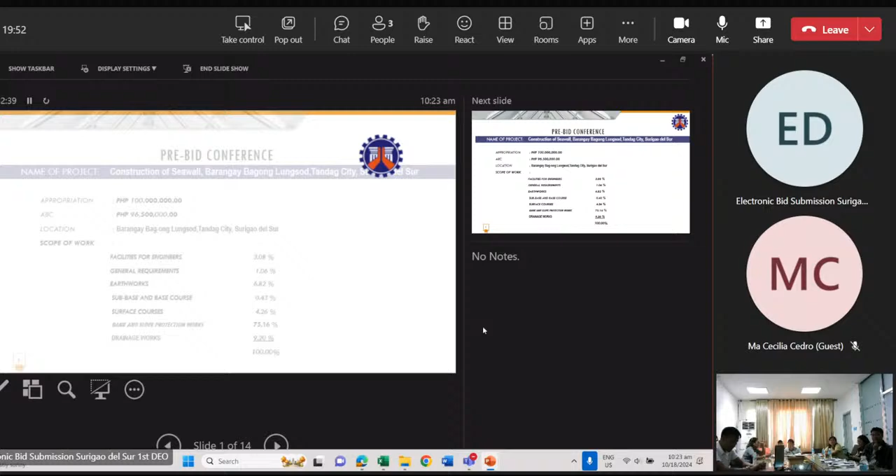Good morning everyone. For 25-8-0007, construction of Seawall, Barangay Bagong Lungsod, Tandag City, Surigao del Sur. Appropriation 100 million, ABC 96,500,000, located at Barangay Bagong Lungsod, Tandag City, Surigao del Sur.

Scope of work: facilities for engineers 3.08%, general requirements 1.06%, earthworks 6.82%, sub-base and base course 0.43%, surface courses 4.26%, bank and slope protection works 75.16%, drainage 9.2%. Total 100%.

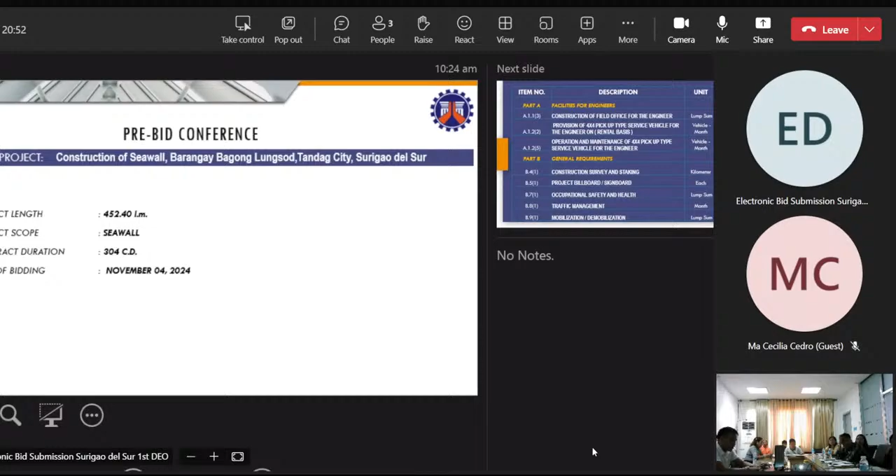Project length 452.4 linear meters, project scope is a seawall, contract duration 304 calendar days, date of bidding November 4, 2024.

For Part A, facilities for engineers: item A.1.13, construction of field office for the engineer, lump sum 1. A.1.22, provision of 4x4 pickup type service vehicle for the engineer on rental basis, vehicle month 10.13.

A.1.25, operation and maintenance of 4x4 pickup type service vehicle for the engineer, vehicle month 10.13. For Part B, General Requirements.

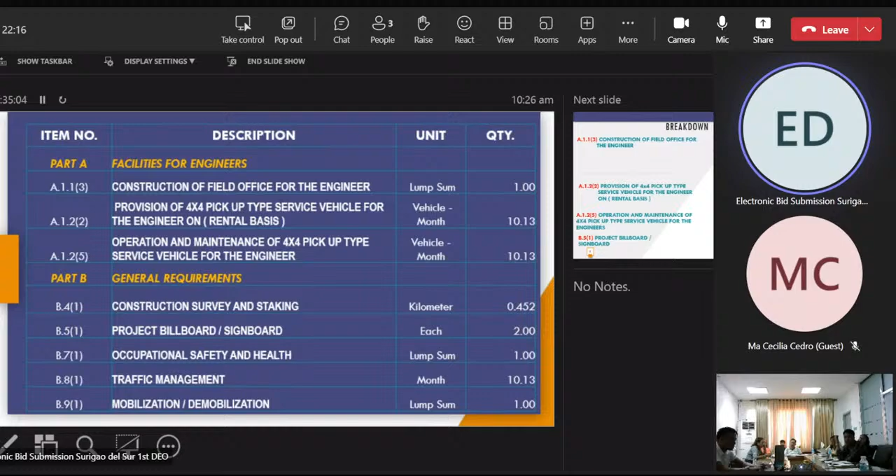B.41, Construction Survey and Staking, kilometer 0.452. B.51, Project Billboard/Signboard, 2 units. B.71, Occupational Safety and Health, 1 lump sum. B.81, Traffic Management, 10.13 month. B.91, Mobilization/Demobilization, lump sum, 1.

For project billboard, 2 units means 2 unit 4x8 with tarpaulin for DPWH and 2 units for UA. This is our project billboard design. Occupational safety and health: 1 first aider full-time, 1 safety practitioner/officer part-time.

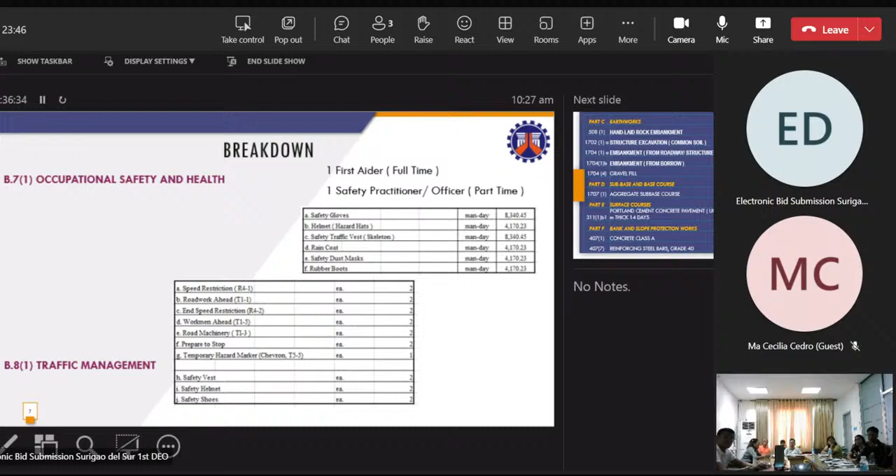Part C, earthworks: 5081, hand-laid rock embankment, 2,428.32 cubic meter. 17021A, structure excavation common soil, 439.29 cubic meter. 17041A, embankment from roadway/structure excavation, 439.29 cubic meter.

17041B, embankment from borrow, 6,236.75 cubic meter. 17044, gravel fill, 5.11 cubic meter.

For Part D, sub-base and base course: 17011, aggregate sub-base course, 542.88 cubic meter. Part E, surface courses: 3111B1, Portland cement concrete pavement unreinforced, 0.2m in 14 days, 2,714.4 square meter. Part F, bank and slope protection works: 4071, concrete Class A, 59.99 cubic meter.

4077, reinforcing steel bar, grade 40, 5,124.34 kilogram. Painting works, masonry/concrete, 318.08 square meter. Painting works, steel, 881.25 square meter. Grouted riprap Class A, 758.63 cubic meter.

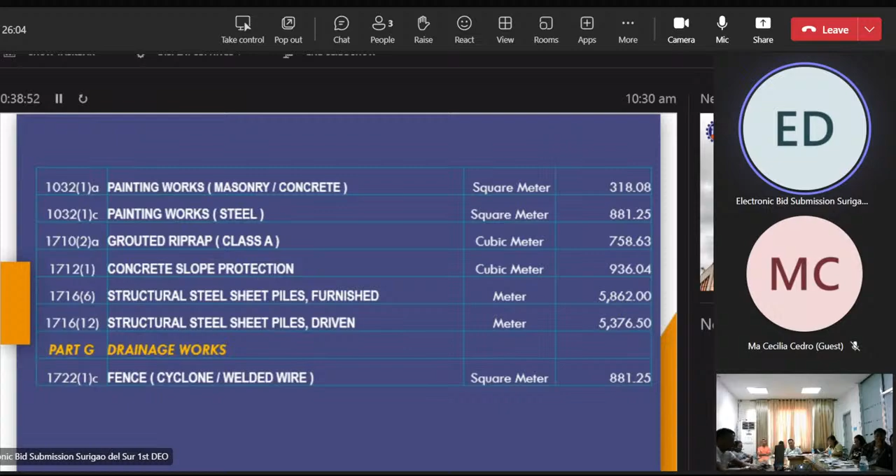Drainage work for Part G: fence, cyclone/welded wire, 881.25 square meter. Minimum equipment requirements: we have 4 dump trucks, 1 vibro hammer, 2 transit mixers, 1 water truck, 2 concrete mixers, 1 bagger, 1 concrete vibrator, 1 concrete shredder, 1 concrete cutter, 1 truck mounted crane.

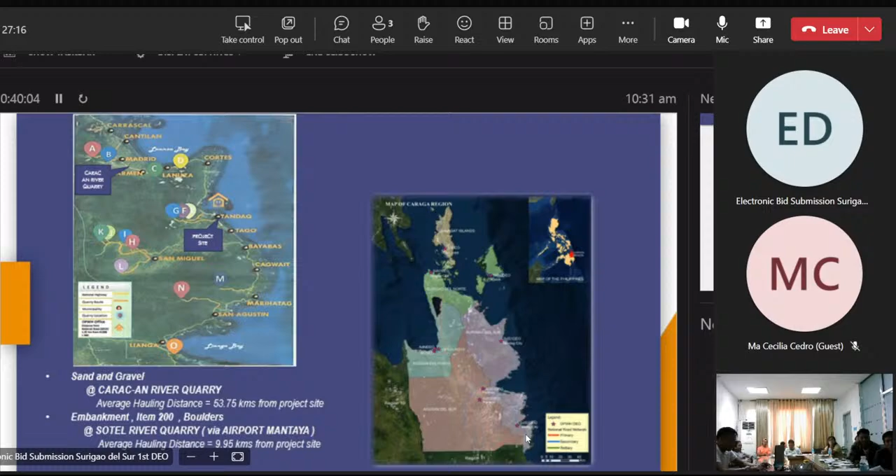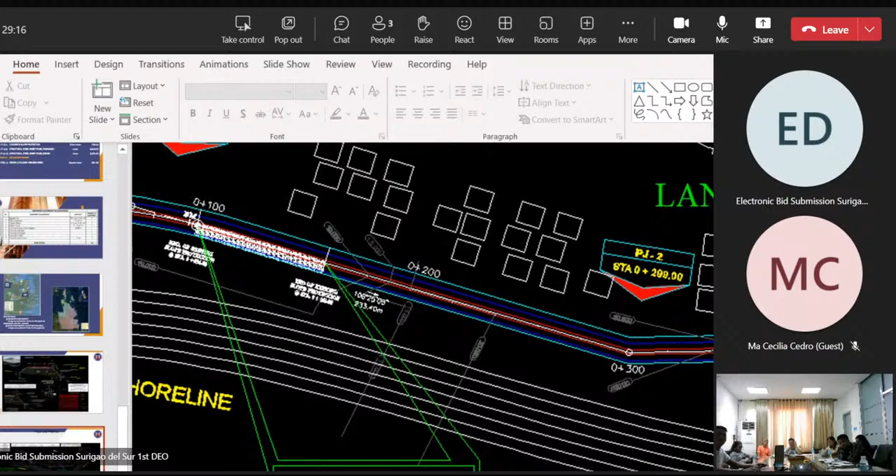So, those are the facts of this project, Bagong Seawall.

So, any questions from stakeholders, any reactions, any particular part of the discussion?

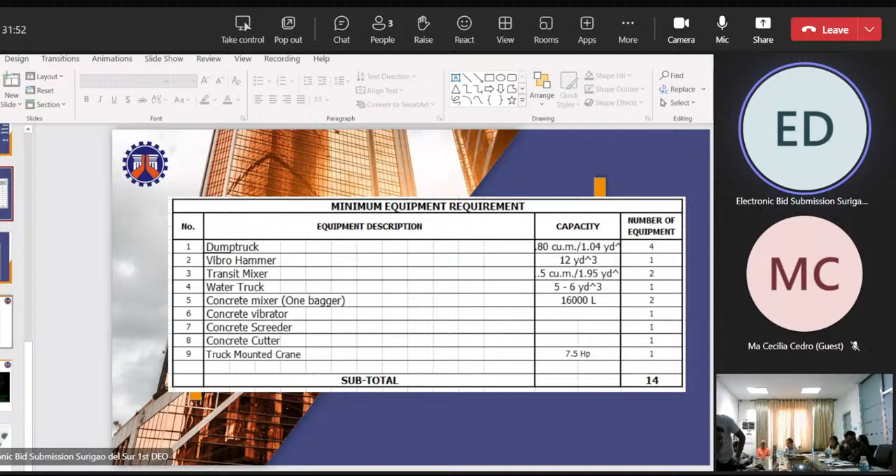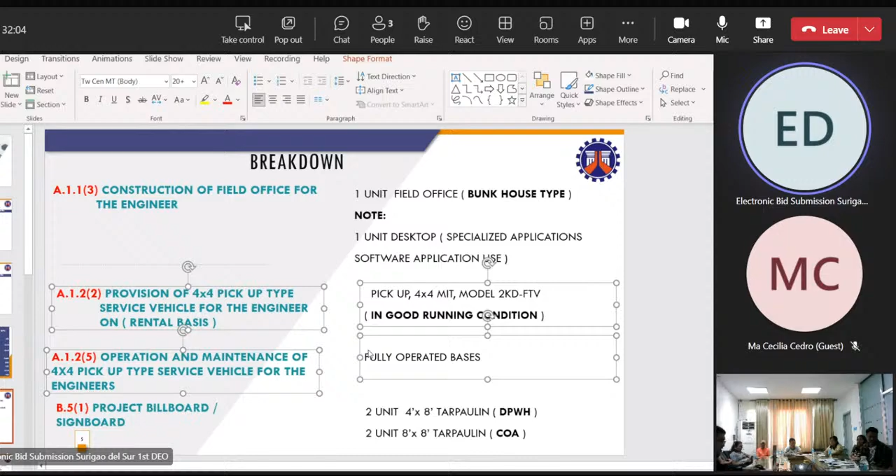Okay, thank you, Washington. For the next project, we have construction of bridge.

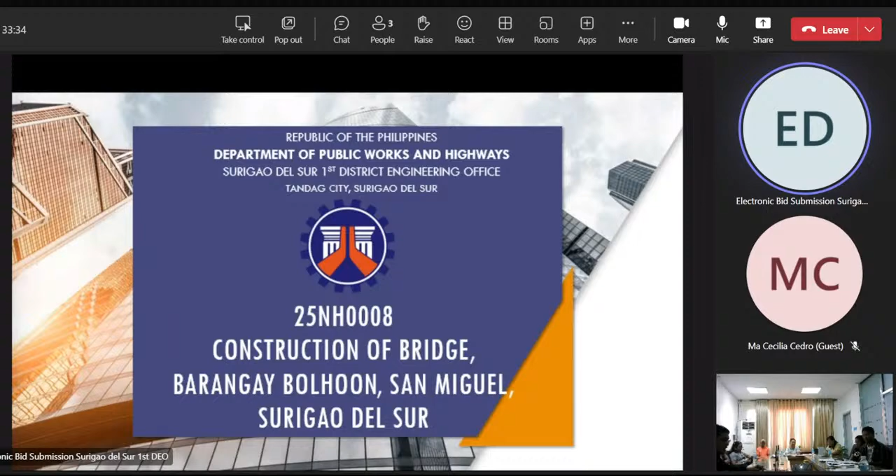So allocated amount or appropriation for this project is 400 million with an ABC of 96.5 million. Location for the project is at Barangay Bolhoon, San Miguel, Surigao del Sur.

Scope of works for these projects are as follows: facilities for the engineer 1.8%, general requirements 23.77%, earthworks 0.94%, sub-base and base course 0.123%, surface courses 1.67%, bridge construction 69.46%, drainage and slope protection structures 2.22%, and materials details 0.017%, totaling 100%.

Project length is 105 linear meters, 3 spans, 35 meters each span. Bridge area is 1,001.70 square meters. Project scope is new construction of 3 35-meter span PCDG bridge and transition road. Calendar days is 291. Date of bidding is on November 4, 2024.

Shown in the screen are the item numbers, descriptions, unit, and quantities for Parts A and B, or the facilities for the engineers and general requirements.

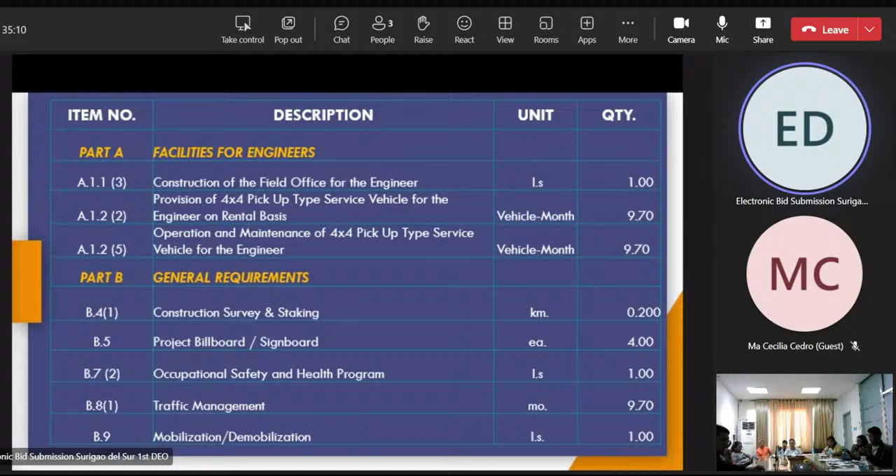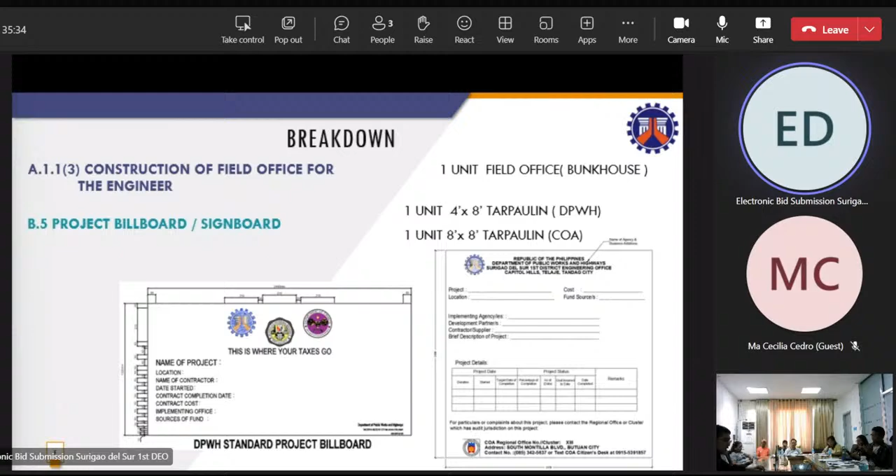So for its breakdown, we have A.1.1(3), or the construction of field office for the engineer. We will be using 1 unit field office bunkhouse. Also for B.5, project billboard or signboard, provide 1 unit 4x8 tarpaulin for DPWH and 8x8 tarpaulin for COA.

Additionally, for A.1.2(2), or the provision of 4x4 pickup type service vehicle for the engineer, on rental basis, we will be using pickup 4x4 MIT model 2KD-FTV in good running condition. And for it to be operated, an additional item is included, which is A.1.2(5), or the operation and maintenance of the 4x4 pickup type service vehicle for the engineers.

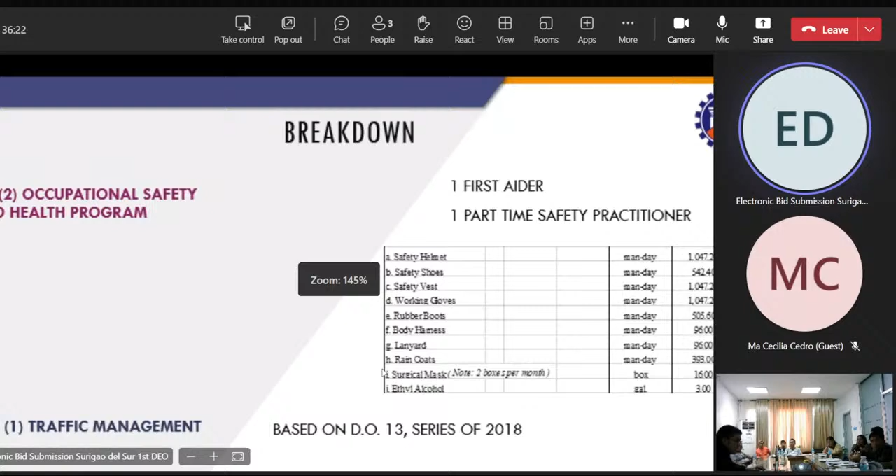So for B.7(2), or the Occupational Safety and Health Program, 1 first aider and 1 part-time safety practitioner. For B.8(1) traffic management, it is based on D.O. 13 series of 2018, which will be shown later on.

And for the craneway, which is B.18.1, use steel materials for crane.

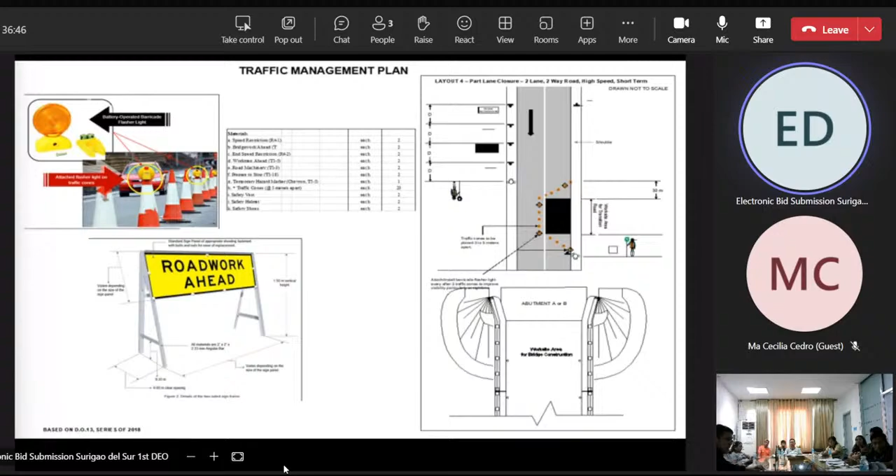So this is the traffic management plan for this project, which is the layout for part lane closure, two-way road, high speed, short term. Also, materials are shown.

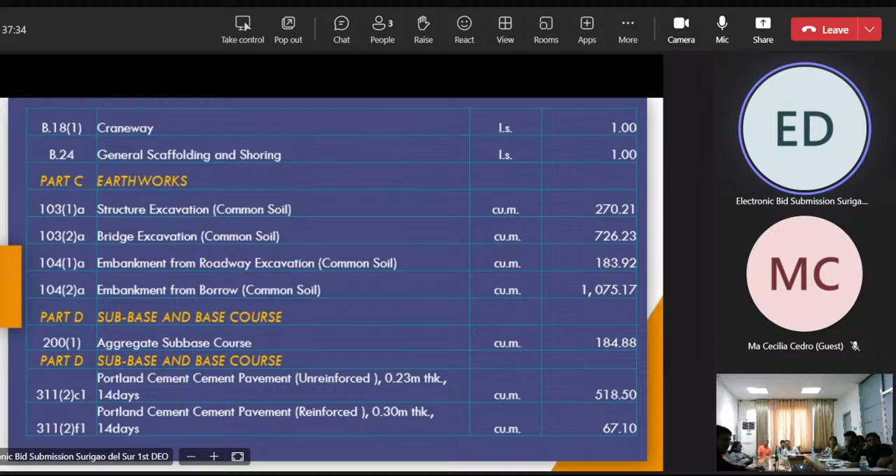Next, also shown are Part C items, description and unit quantities for Part C, which is earthworks, Part D, sub-base and base course, and Part D, surface courses.

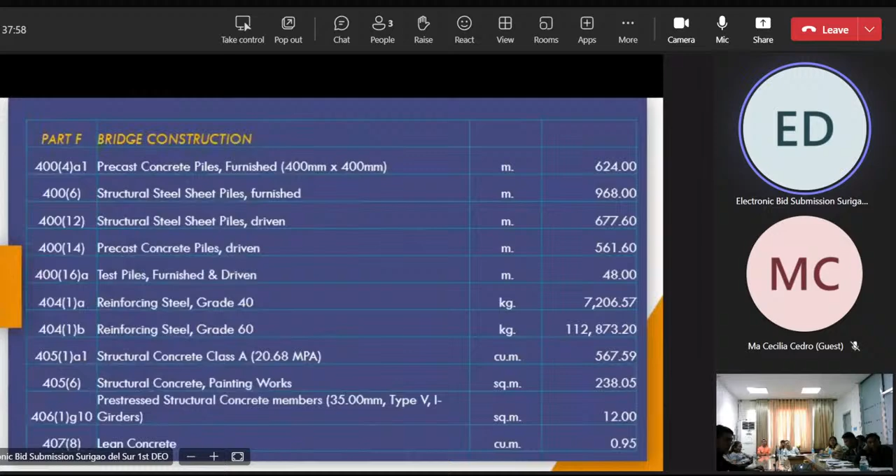So next is Part F for the bridge construction. In this project, since it is PCDG, we will be using item 4061 G10 pre-stressed structural concrete members, 35 meters, type 5 I girder, for a total of 12.

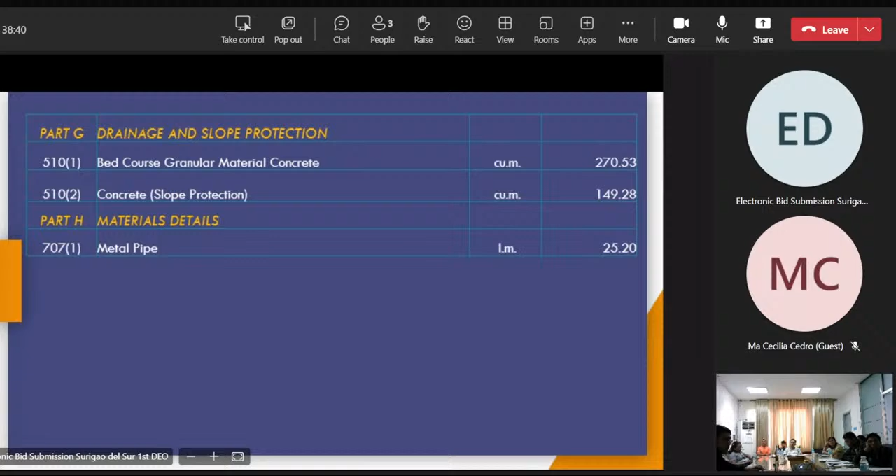Then for Part G, drainage and slope protection, and Part H, material details. For the minimum equipment requirements, we have a total of 16, which includes 4 dump trucks all models, 1 water truck, 2 transit mixers, 1 backhoe, motorized grader, vibratory roller, cargo or service truck, joint sealer equipment, truck mounted crane, diesel hammer, and vibro hammer.

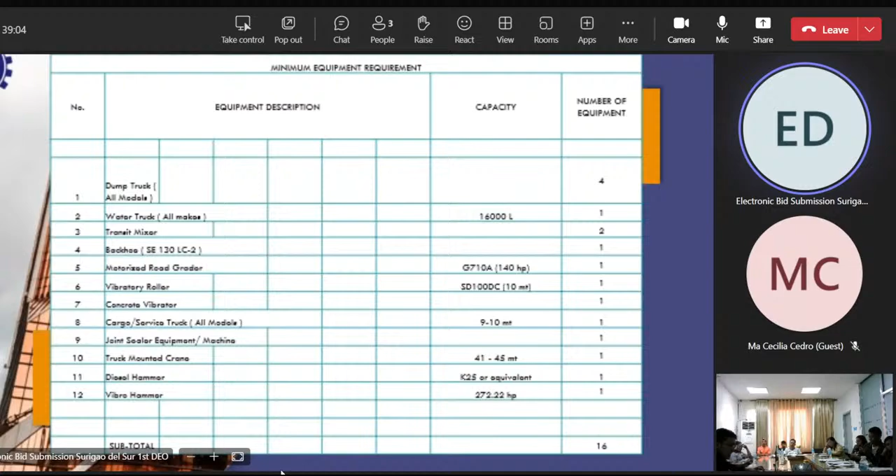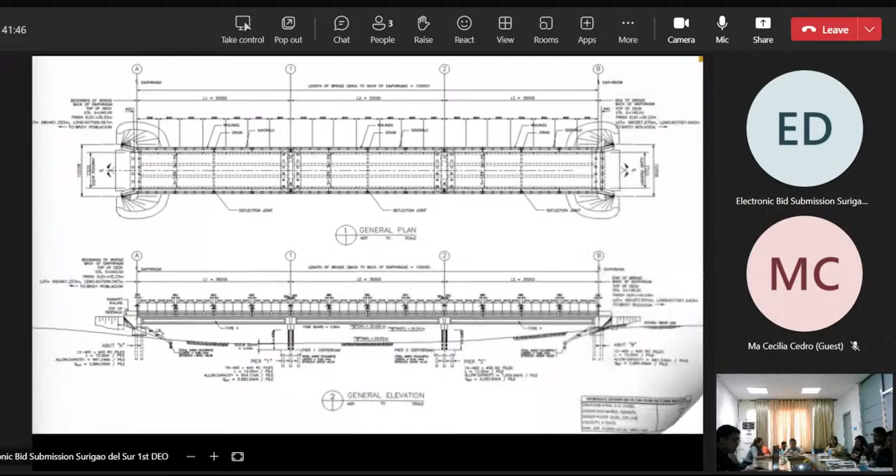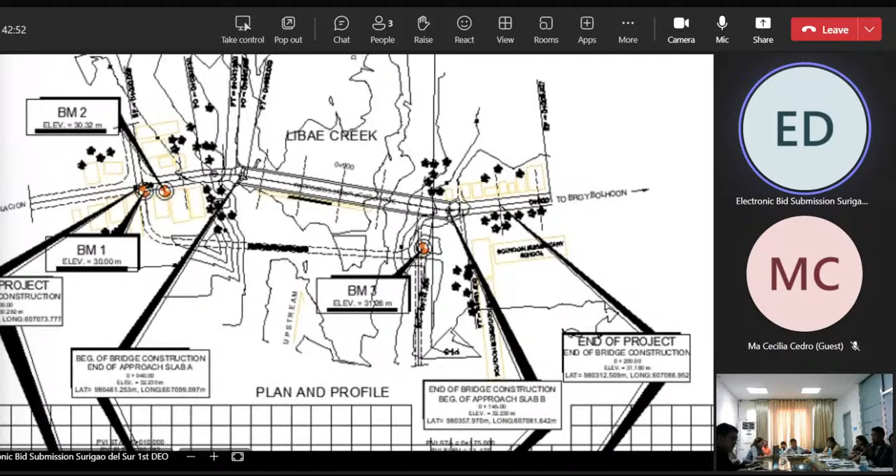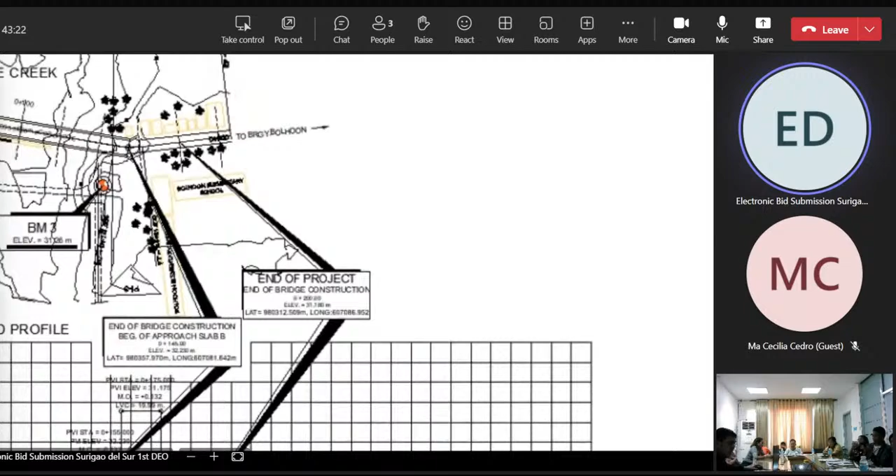So beginning of project will start at 0+00. Then also beginning of road construction for the transition road. Then for the beginning of bridge construction and end of approach slab A, at station 0+040. Then end of bridge construction and beginning of approach slab B at station 0+145. Then the end of project and end of bridge construction, end of transition road is at 0+200.

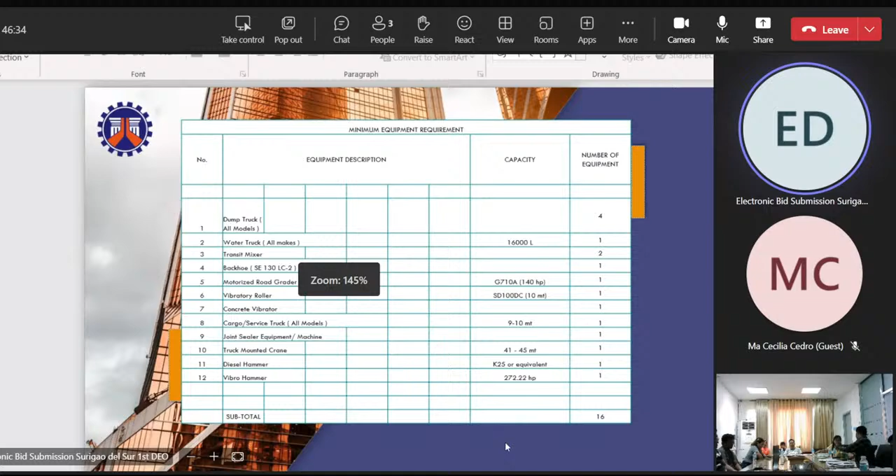So, any question from representatives of the contractor?

Any comment? None. So, thank you, Digimon.

So we'll proceed with the next project. Next project is...

55-009 Campanubay Bridge. Actually, this is retrofitting. The scope of work by me is, see it? Retrofitting.

So the ABC is only 2.99488 million. Go ahead. Go ahead.

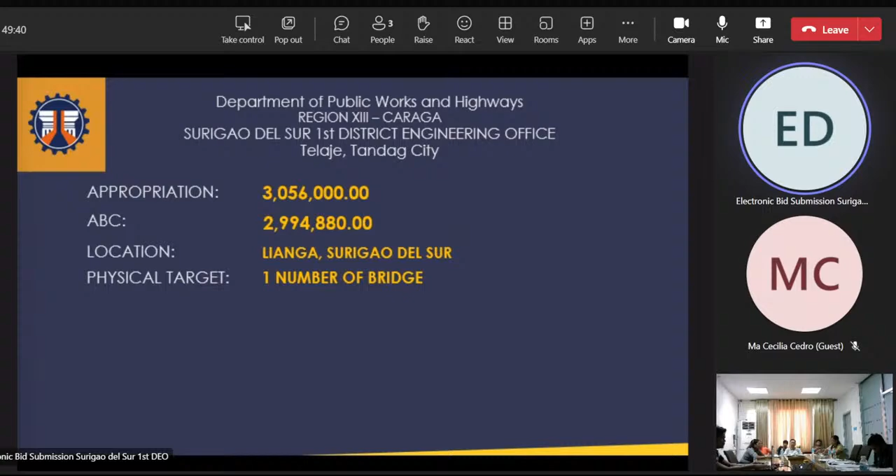Physical target: 1 number of bridge. Project scope: retrofitting and strengthening of permanent bridge A. Installation of carbon fiber sheet and plate.

Replacement of approach slab at abutment B. Replacement of pavement markings, replacement of concrete slope and concrete paintings. Project duration: 69 calendar days.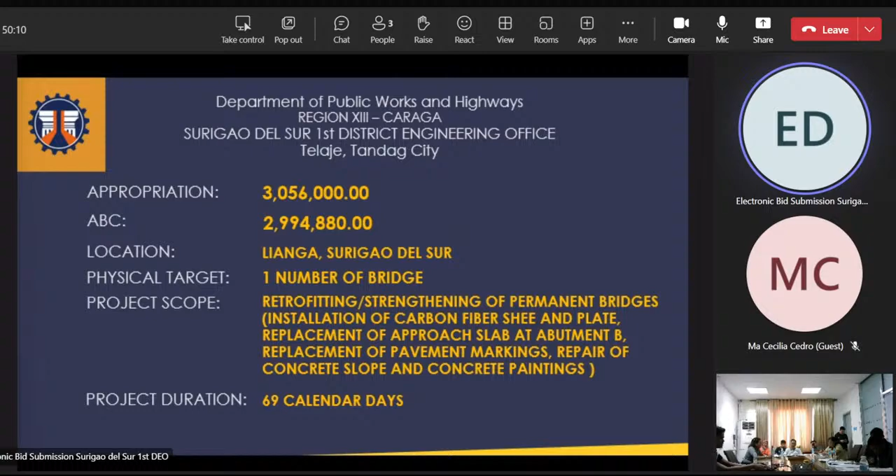Scope of works: facilities for engineers 4.22%, general requirements 12.28%, earthworks 11.69%, surface courses 11.10%, bridge construction 35.7%, bank and slope protection works 24.57%, miscellaneous structure 0.44%, total of 100%.

For A.1.1 parenthesis 3, construction of field office for the engineers, we have 1 unit field office, bunkhouse type.

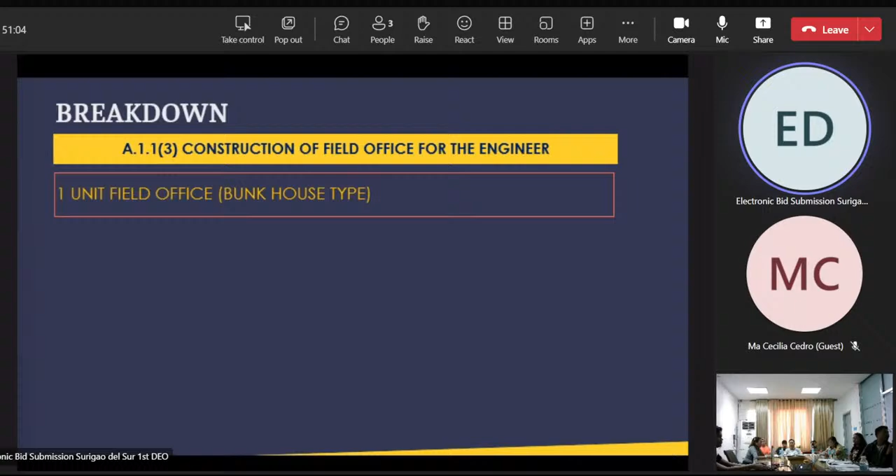For B.5, project billboard, we have 1 unit of DPWH tarpaulin and 1 unit COA tarpaulin. For B.7, occupational safety and health program, provision of the following: 1 health personnel and 1 safety practitioner.

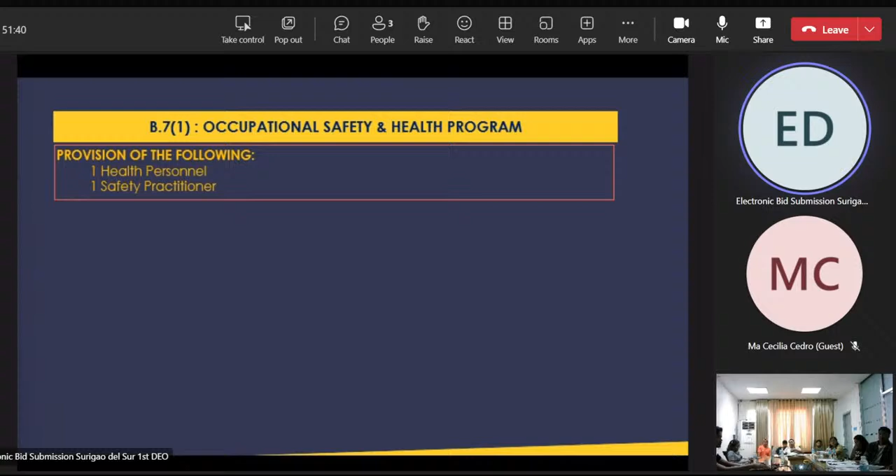For the materials, name and specification, unit and quantity are shown.

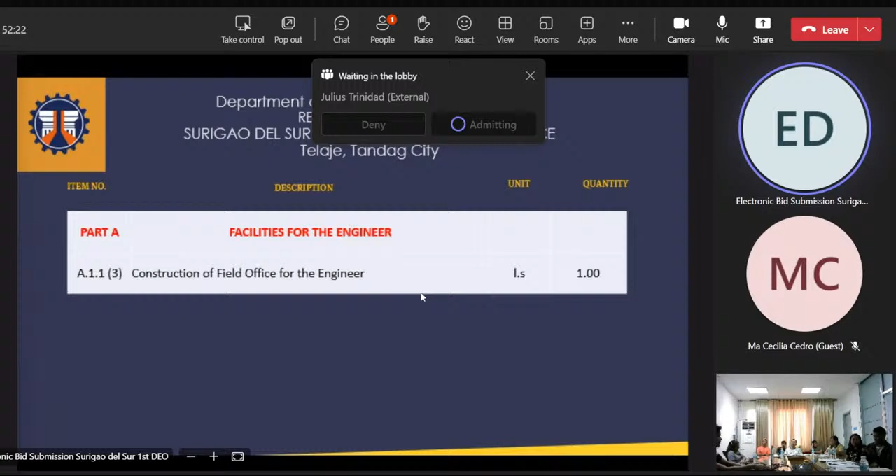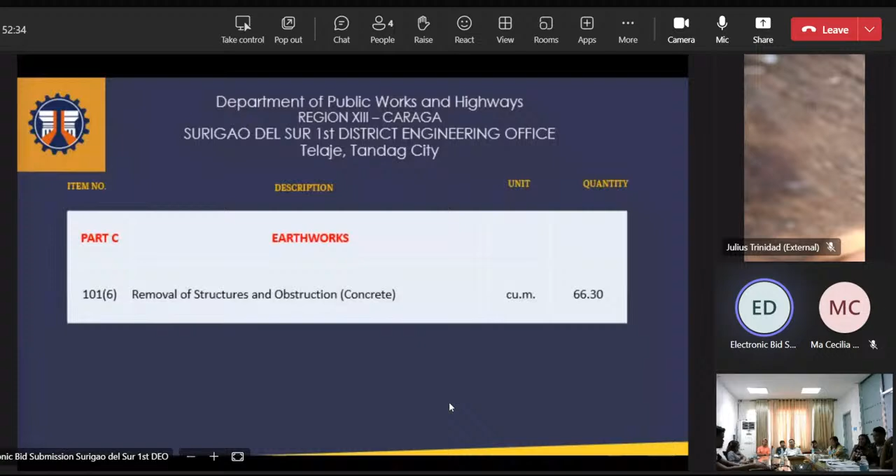Item number, description, unit and quantity for Part A, facilities for the engineer are shown. For Part B, general requirements. Part C, earthworks. Part D, surface courses. Part E, bridge construction. Part F, bank and slope protection work. Part G, miscellaneous structures.

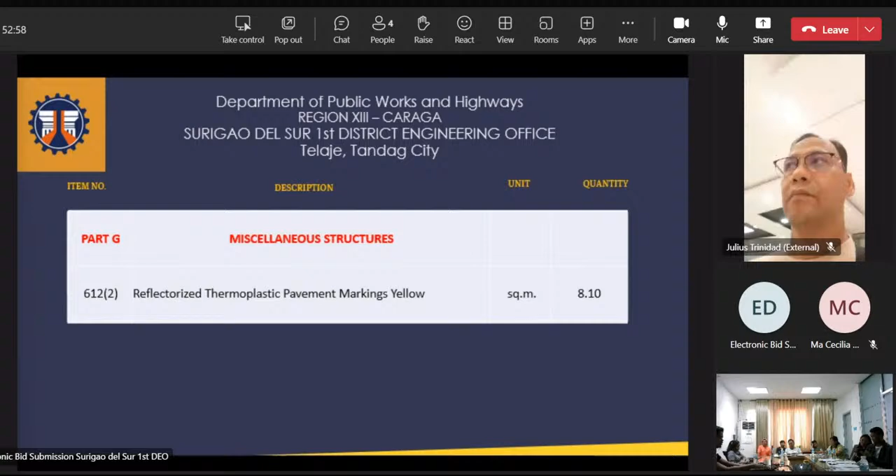For minimum equipment requirements: 1 backhoe, 1 dump truck, 1 water truck or pump, and 1 concrete mixer and pump.

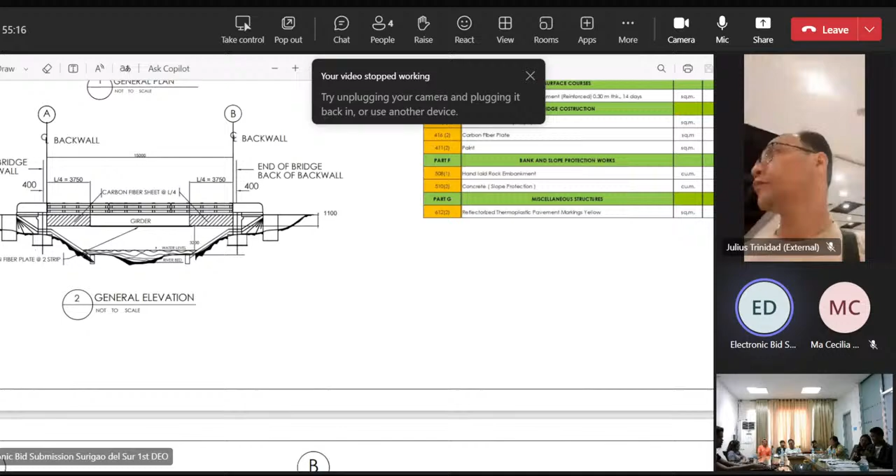So for our plans, we have general plan, and general elevation, and for...

Carbon fiber sheet plan, carbon fiber sheet elevation, typical cross-section.

For our carbon fiber plate plan, carbon fiber plate elevation, typical cross-section.

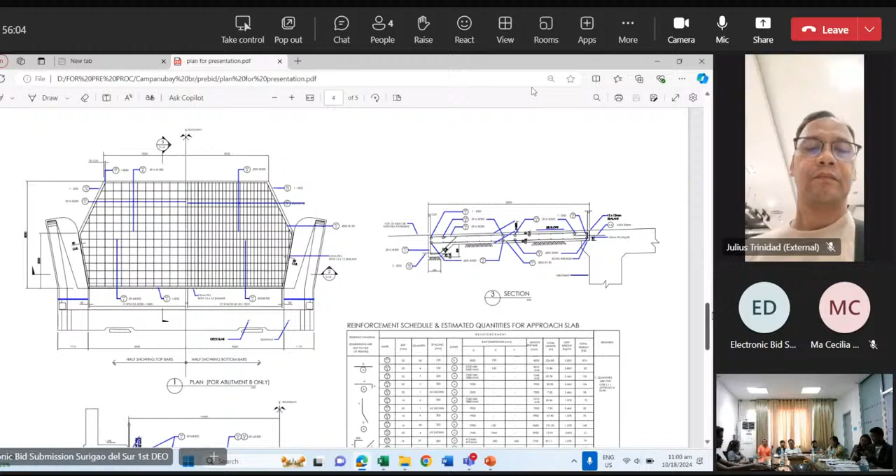So for our approach slab plan for abutment B only, in section.

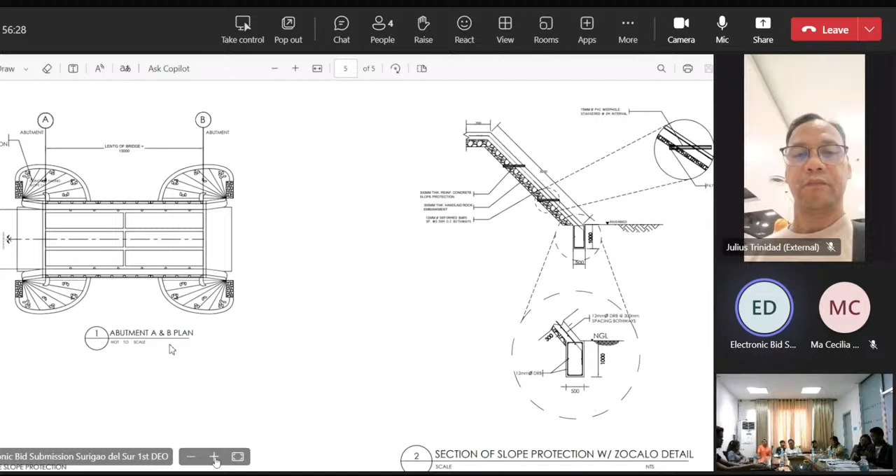And for our slope protection, both abutment A and B, plan, section of slope protection.

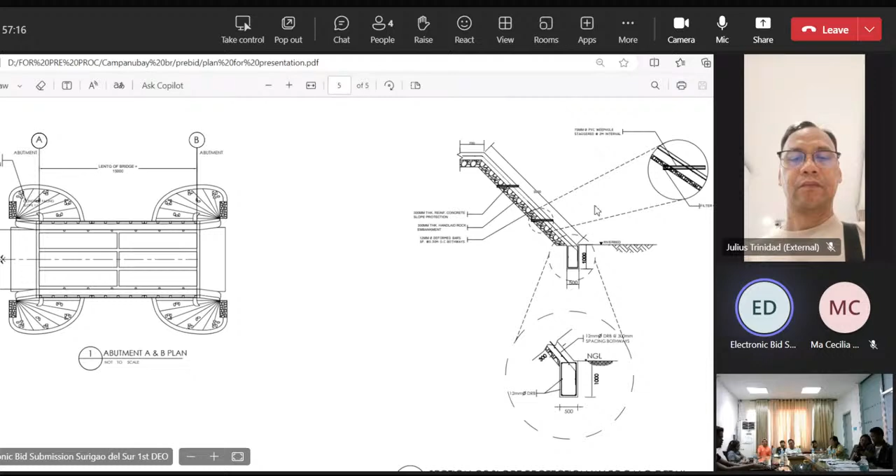So that's all. Thank you.

So, any comment? We've already exchanged ideas. Any more comment from our observer? There's a correction. So, thank you.

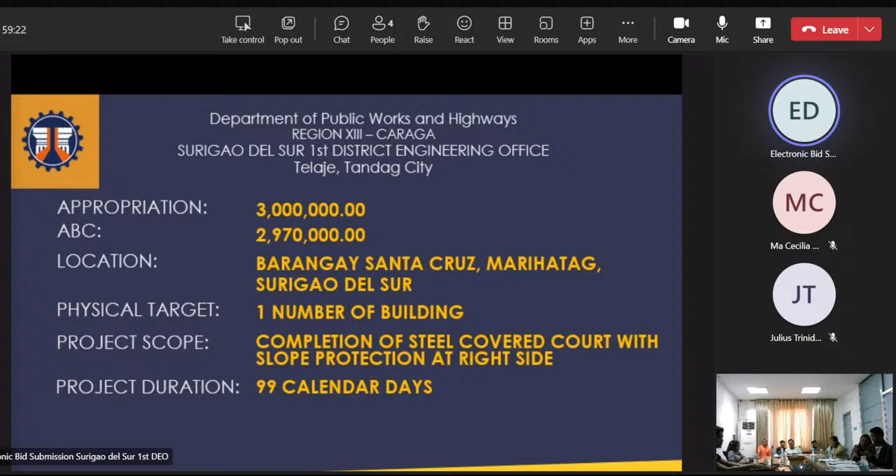Scope of work: facilities for engineers, 4.62%. General requirements, 4.49%. Earthworks, 3.91%. Plain and reinforced concrete work, 21.11%. Finishings and other civil works, 43.76%. Electrical works, 5.57%. Bank and slope protection works, 11.76%. Auxiliary works, 5.07%, with a total of 100%.

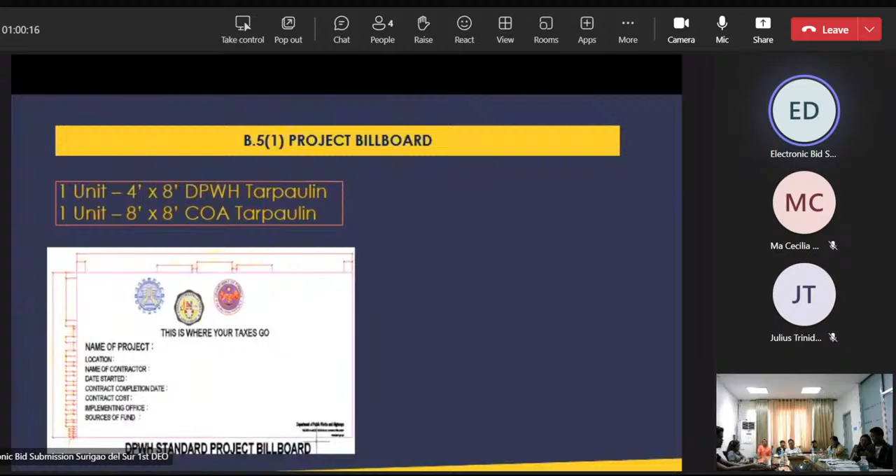Breakdown. For the construction of field office for the engineer, we have 1 unit field office bunkhouse type. For the project billboard, 1 unit 4x8 DPWH tarpaulin and 1 unit 8x8 COA tarpaulin. Both are backed with marine plywood.

Occupational safety and health program. Provision of the following: 1 health personnel and 1 safety practitioner.

Materials for this: description, unit, and quantity are shown.

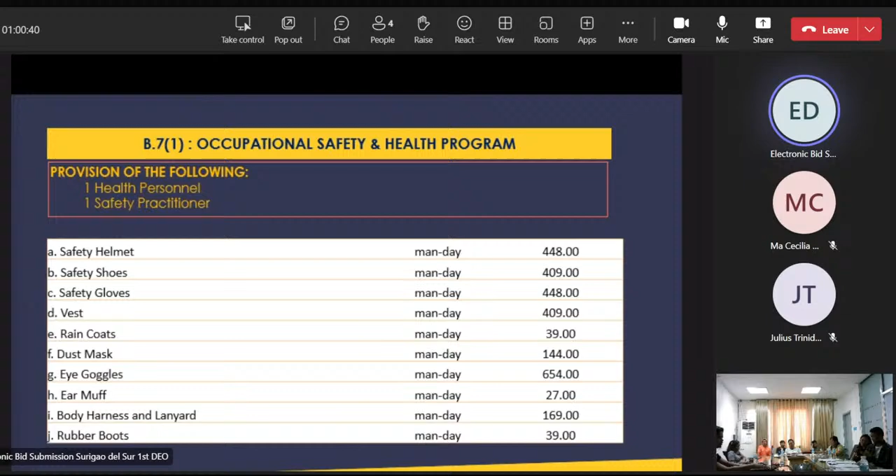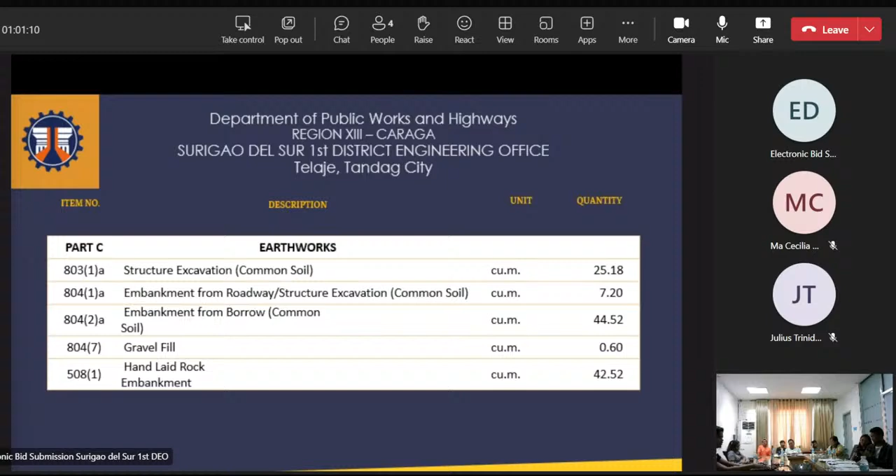Item number, description, unit, quantity are shown for Part A, facilities for the engineer. For Part B, general requirements. For Part C, earthworks. For Part D, plain and reinforced concrete work, item number, description, unit, and quantity are shown.

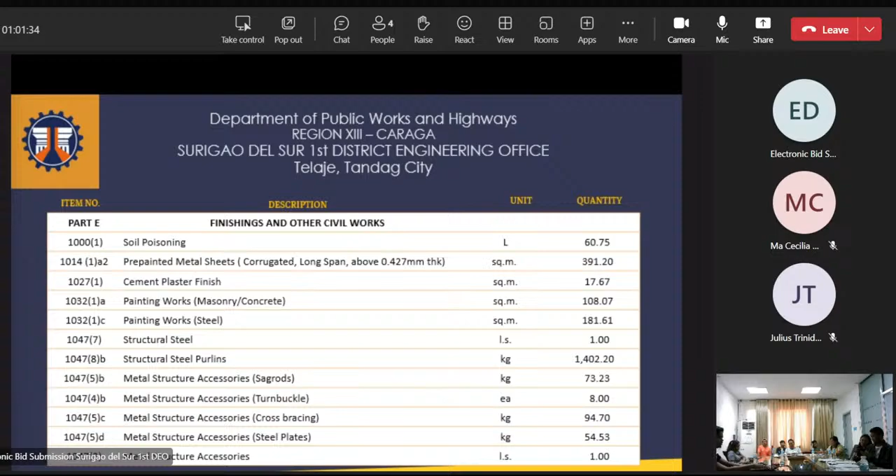For Part E, finishings and other civil works, item number, description, unit, and quantity are shown. Part F, electrical works. Part G, bank and slope protection works. Part H, auxiliary work.

Minimum equipment requirement: one backhoe, one dump truck, one plate compactor, one bagger mixer, and one concrete vibrator.

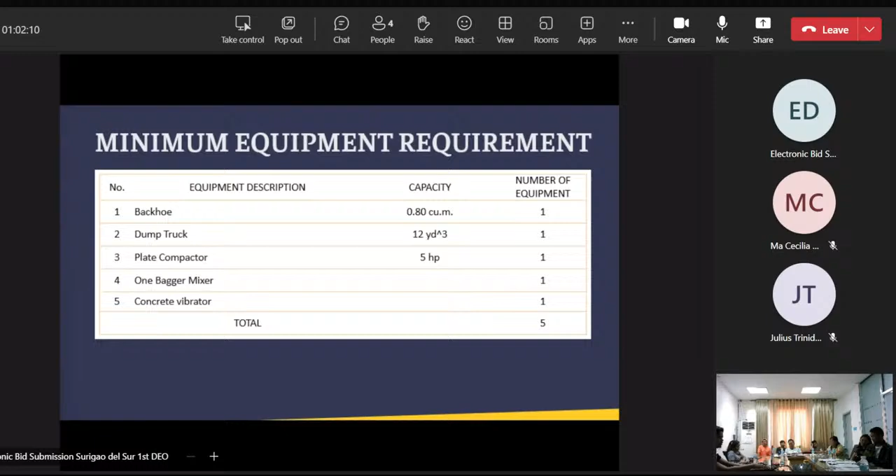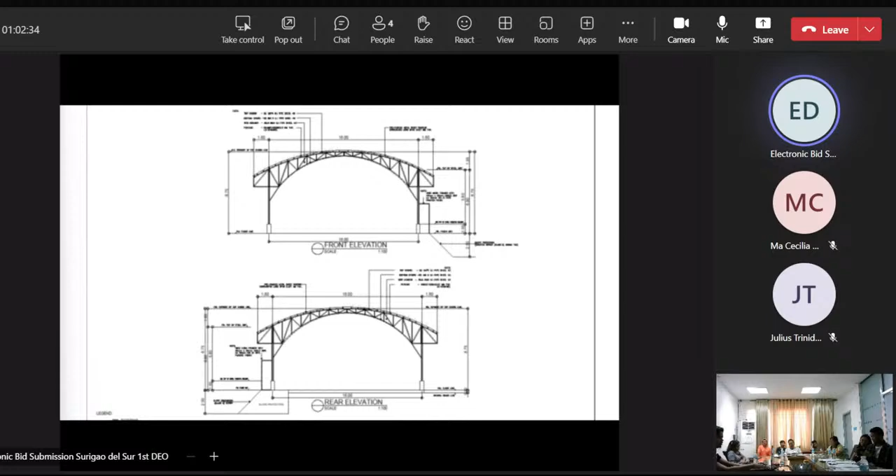Here on the side, floor plan, front elevation and rear elevation.

Okay, continue so we can see its position. Left side elevation, right side elevation. Cross section B and linear section.

Roof plan or structural plan, condition plan, and typical section of slope protection unit.

Footing details still displayed are shown. Roof framing plan.

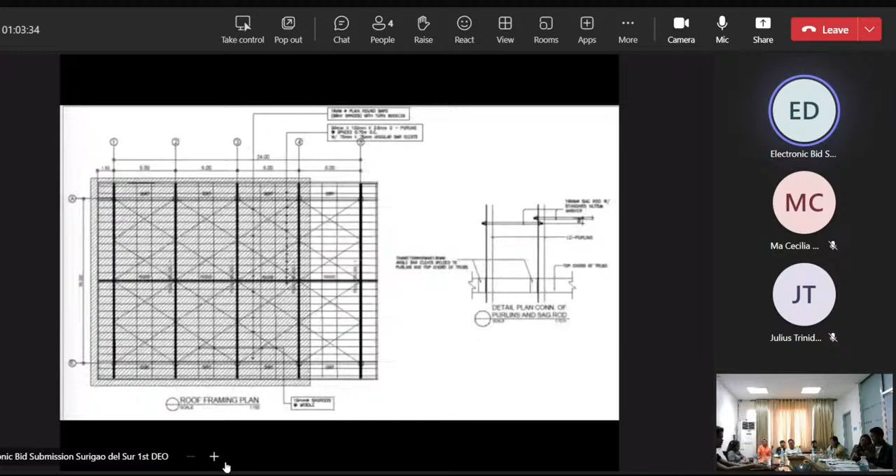Ridge detail, girt detail, connection with the girt, full truss detail are shown. Fascia side frame detail and fascia front rear frame detail.

Electrical works, electrical lighting layout plan shown.

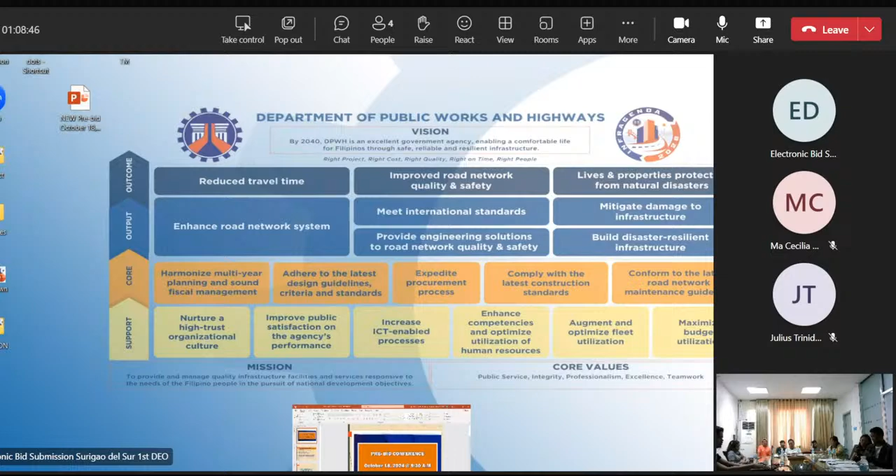So, anyone? Okay, thank you, Chris.

So, we have already completed presenting the details of 4 projects. And I'll go to the agenda for pre-bid conference to be presented by Alvin.

These are actually the requirements for the documents to be submitted by the bidders, for the technical components of the bid. We have the valid PhilGEPS registration certificate, statement of all ongoing government and private contract projects, single largest completed contracts supported by the certificate of final acceptance, for the special PCAB license in case of joint venture and registration, bid security, organizational chart for the contract, list of contractors key personnel, list of major equipment, and for the list of contractors key personnel, we have the requirements for the accredited project engineer in accordance with Department Order Number 118 Series of 2024. Then, for the list of major equipment, omnibus sworn statement, NFCC computation, and statement of total assets and total liabilities in GBA if applicable.